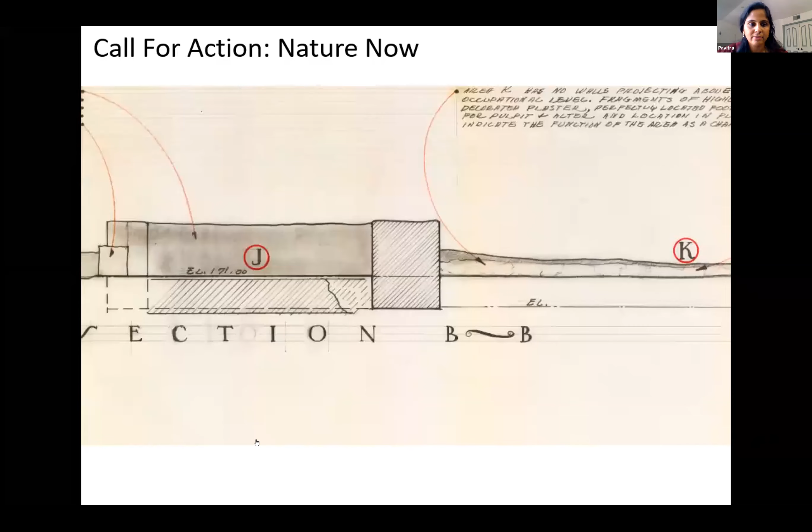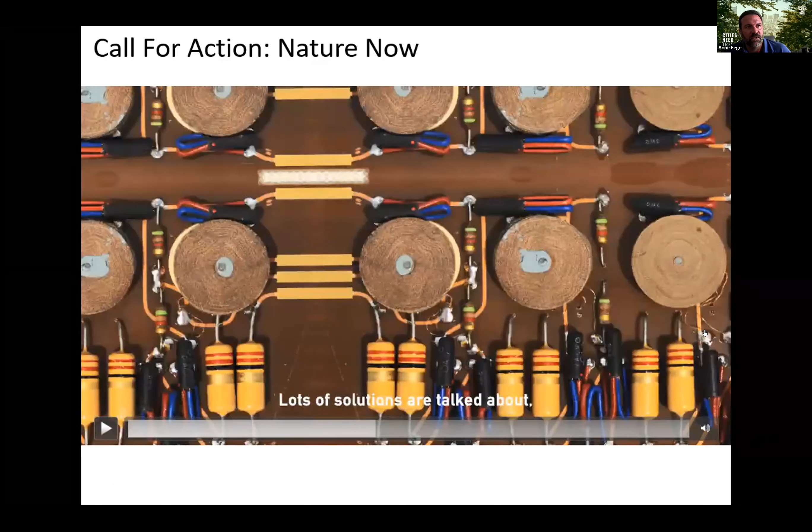Hey Pavitra, we're not able to hear the audio. Do we want to put a link in the chat so we can move on to the presentations? Sorry about that, you can't hear it? We see the video but can't hear the audio. Let me see if I can fix it. Maybe in the interest of time, we put a link in the chat so people can watch it later. It's Greta Thunberg, our famous climate activist, so I'll share the link. Now I'll pass it on to Brian.

Thank you, Pavitra, and what a great panel of speakers. I'm Brian Widener, San Diego City Forester. I manage and direct the San Diego Urban Forestry Program citywide.

I am housed under the Transportation and Stormwater Department, which manages the street trees, but I work closely with the Parks and Rec Department as well as many other departments throughout the city to manage, maintain, and promote our urban forest.

So I'll dive in here, just bear with me. Today I'm going to talk about navigating the recent challenges in our urban forestry program. For background, the City of San Diego urban forest has about 220,000 street trees.

We think we have about 600,000 trees in parks. According to a recent US Forest Service analysis of plot data throughout the city, we think we have possibly about 5 million trees citywide, both on public and private property. And I always like to point out the urban forest isn't just about trees, it's also about people—we have 1.4 plus million citizens in San Diego.

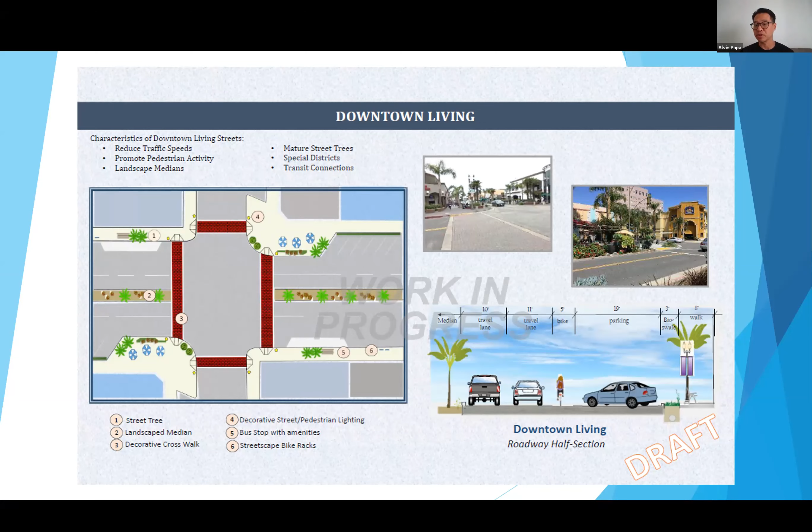So this is an example of what something could look like in our downtown, and this is an example of something within an urban area or one of our secondary connectors. Typically, we try to strive for permeable pavers, putting items in the parkway, bioswales, and landscape medians. This document serves as guidance for our engineers.

In the city of Long Beach, our public works department is comprised of about 500 people, and about 100 of them are in the engineering bureau designing projects.

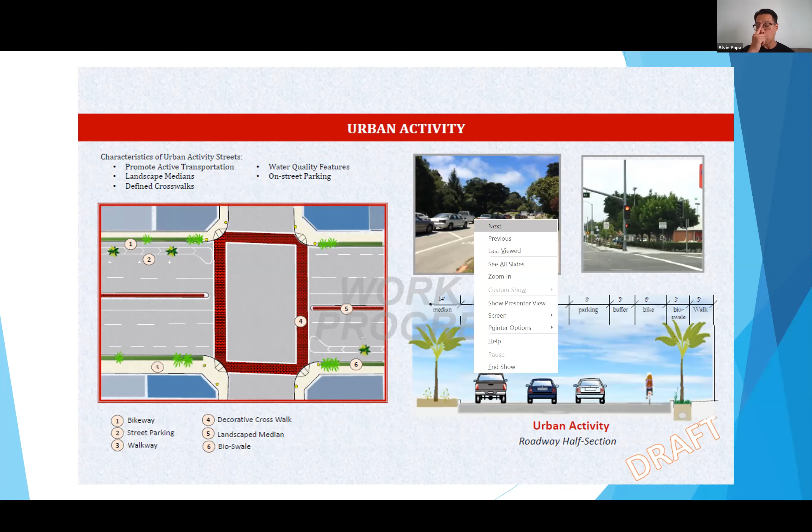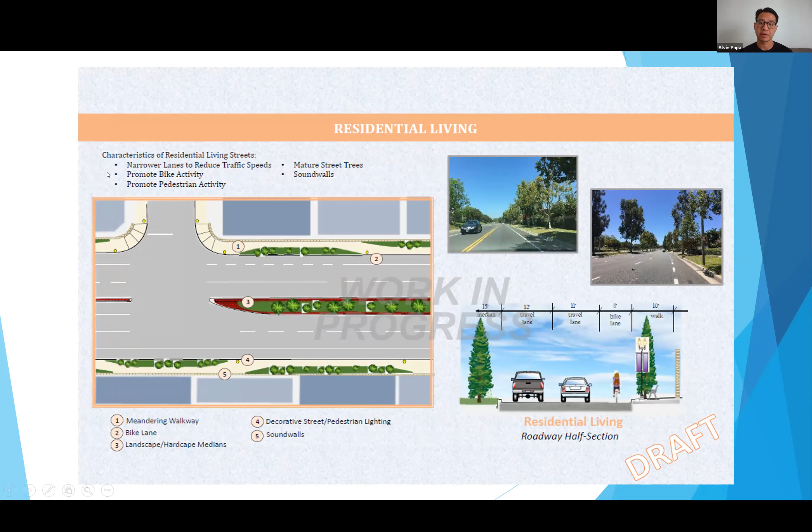So although we do work with developers on identifying low impact development solutions, we're always looking for new technologies and new ways of implementing green infrastructure. That's actually how we met Pavitra - she did a lunch and learn for us on Silva Cell, because we were investigating new opportunities.

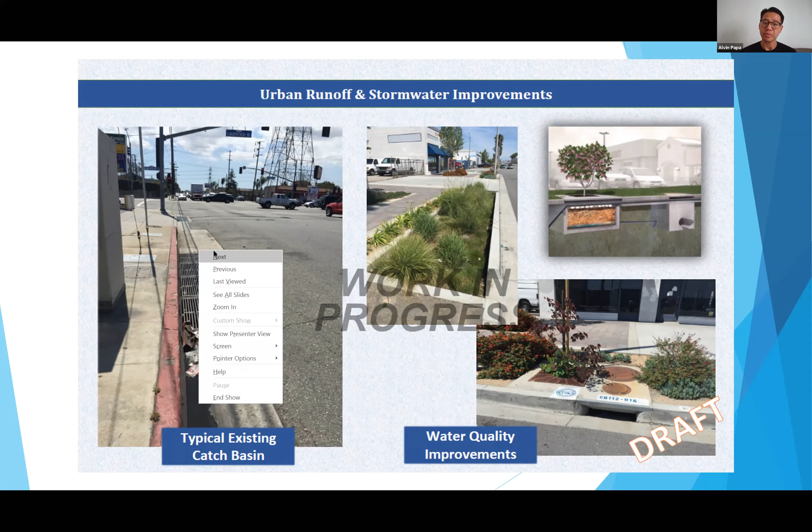This is another page of the water quality planning section of the document, where sometimes we use French drains, sometimes we utilize parkway areas - these are all guidance documents for our engineers.

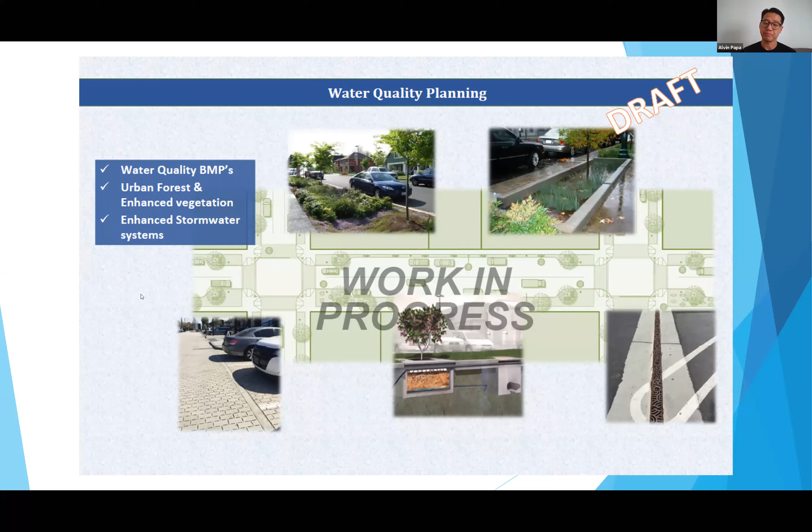We're also working on expanding - this isn't within the document, but we're looking at additional ways to not just use the linear area within the right-of-way, but to identify other locations of opportunity. This is a portion of Artesia Boulevard located by the off-ramps where Caltrans has roundabouts, typically filled with ice plant, which is just extra area not being utilized.

So we look to leverage transportation funding and identify opportunities - where can we take advantage of areas that aren't being used, and how can we plant them with urban greening elements while getting that funded? Typically when we get things funded, it's not strictly from a stormwater perspective - we have to look for multi-benefit projects, connecting to a bike path, passive recreation, or a walking trail. We also look to develop habitat through wetlands, and I'll talk about that a bit later.

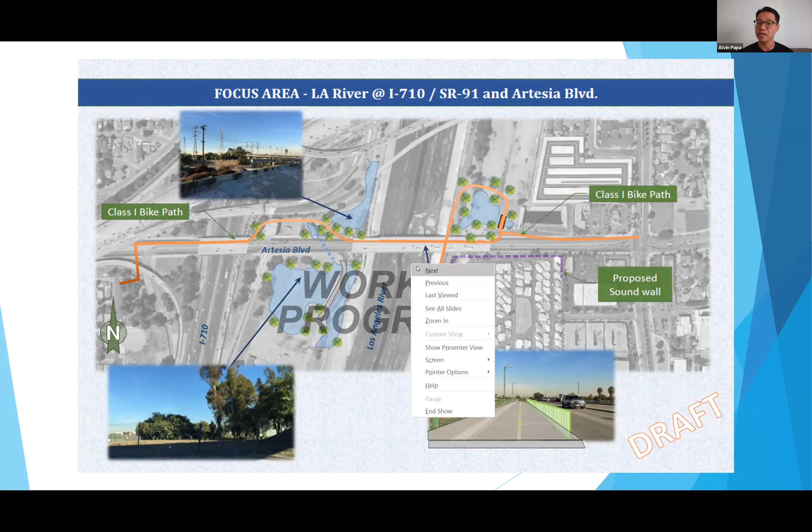In short, the first few slides are the type of documents we use to envision how we want to implement urban greening and green streets. I'm going to talk about Market Street now - this is a project currently in design, at 30% design. It utilizes visioning documents like the one you saw, but I'll talk about what our engineers are going through now.

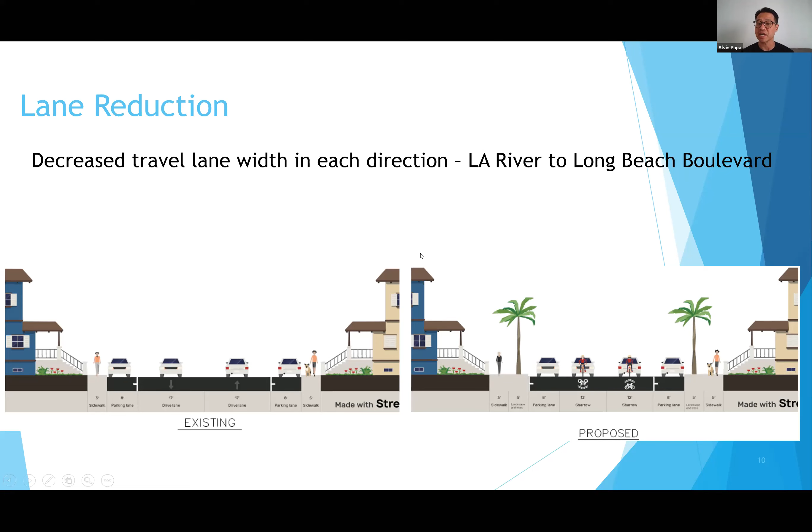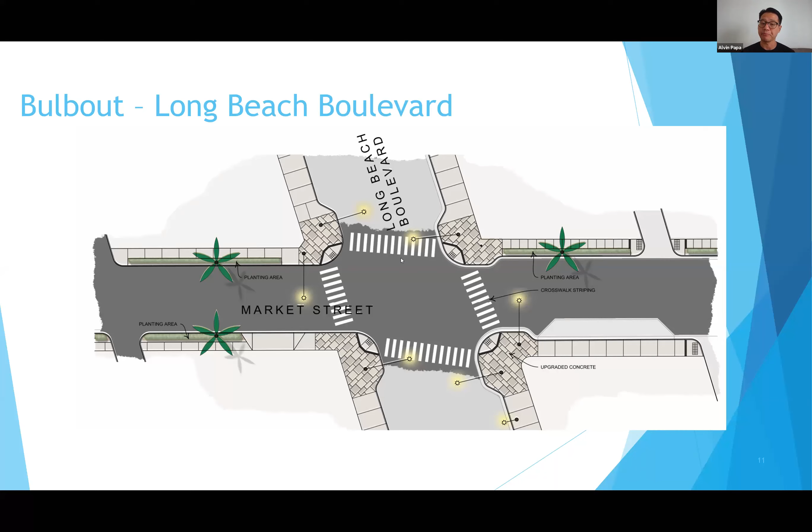Typically we have a spacing requirement for our trees, so we don't really have much opportunity to install new trees unless we're adding additional right-of-way space, or there isn't a parkway that already exists there.

This last section I want to talk about for the next couple of minutes is the LB MUST, a project that's actually in construction. One thing I want to note is complete streets is something we've pushed in the past, but when it comes to urban greening, the biggest impact is on regional projects. That's where we're going to be focusing on finding those opportunities, and the LB MUST is one of those.

LB MUST stands for Long Beach Municipal Urban Stormwater Treatment. This project is a stormwater treatment facility which captures water from the roadway, and it's going to treat about 12,300 acres of land - about 40% of Long Beach. Normally the water would go from the pump station to be pumped into the LA River, but that creates a huge pollution problem for us.

So what we're doing is capturing that water and bringing it to this plant for treatment. As part of this project, we plan on collecting the stormwater through a series of existing pipes, but also identifying areas for wetlands and bioswales. It's about an 8-mile length up and down the LA River within Long Beach. For us, that's a huge opportunity and a big lift, but I think this is the type of project that gets regional significance - it gets a lot of political will behind it. And the best part is it provides multiple benefits, which I'm going to talk about on the next slide.

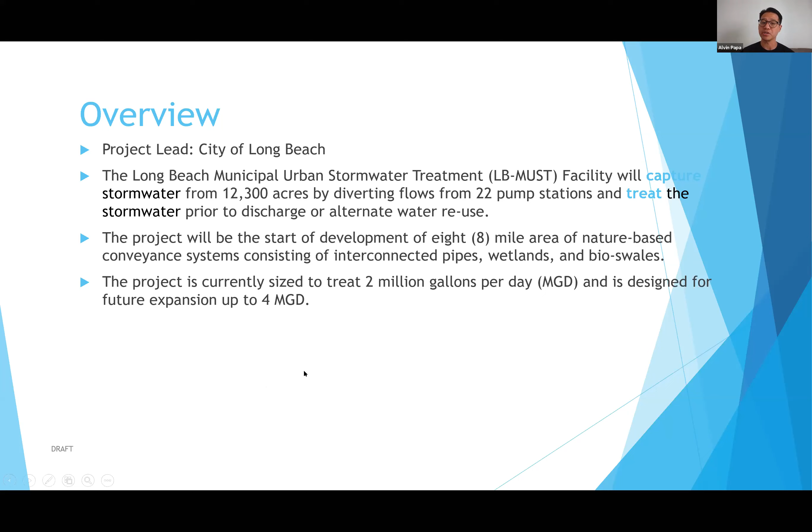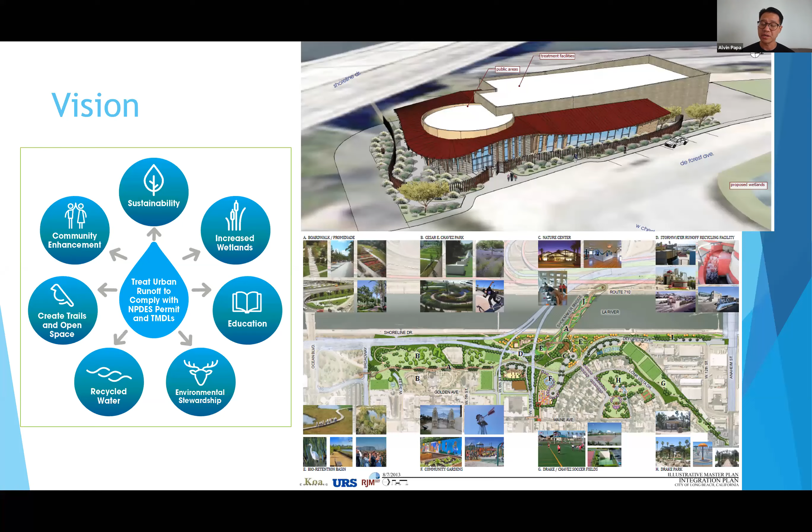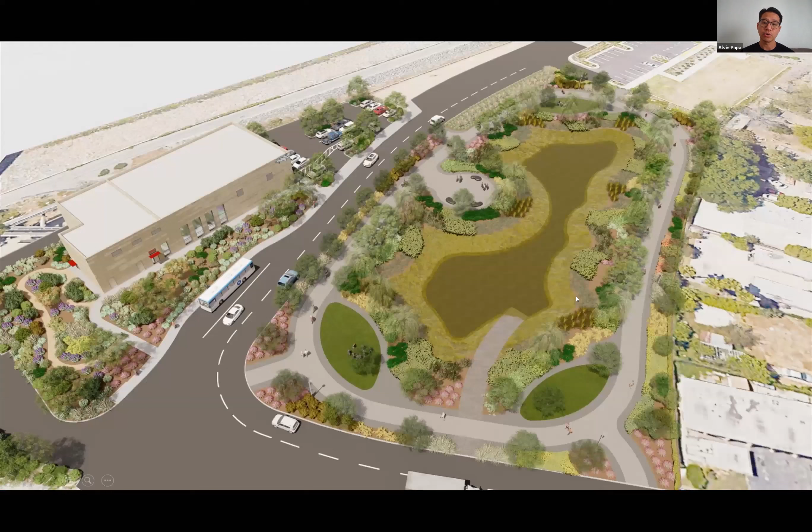So this is what that treatment facility would look like. The wetland would be across the street, and you'll see a garden wrapped around the building—for us, that's going to be a demonstration garden. One of our ideas is to put in low impact development demonstrations, so we plan on doing public-private partnerships with vendors to show us their products and partner with the city on filling that space, hopefully at their cost—we'll see. But that gives them an opportunity to advertise their product.

And when we have developers come into the city and give them requirements to install things within the public right-of-way, we can say, hey, come over to this project—you'll be able to see what we're actually requiring you to install. And that way they can work directly with the vendor or find something similar.

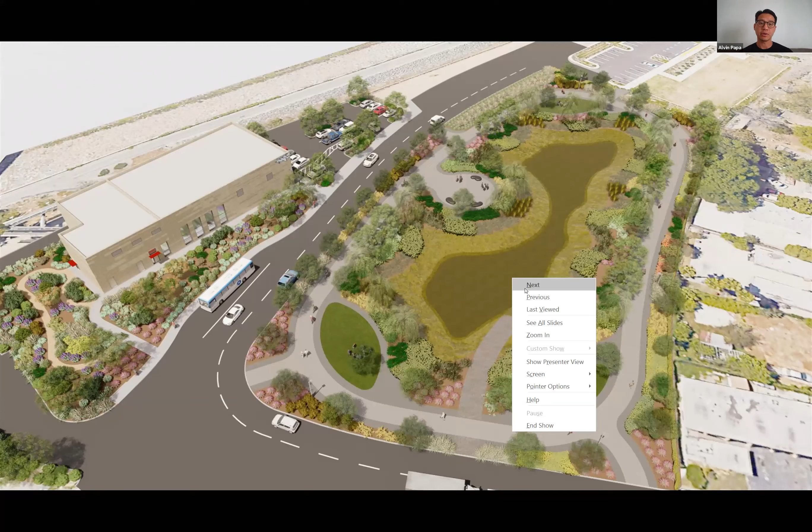So these are just some of the elements that are going to be incorporated in this regional project. Water quality and water supply—that was the impetus for getting a lot of the funding for this project. We got $28 million from Caltrans for stormwater quality. And then we started, as part of the Safe Clean Water program—

the Measure W within LA County is a measure that helped provide funding. They needed multi-benefit, but it's water resiliency. And so the potable water offset features of this project were able to bring approximately $10 million to this project, which we're hoping, cross our fingers, gets approved by the LA County Board this month. We've already begun construction, but we do need that last $10 million to finish.

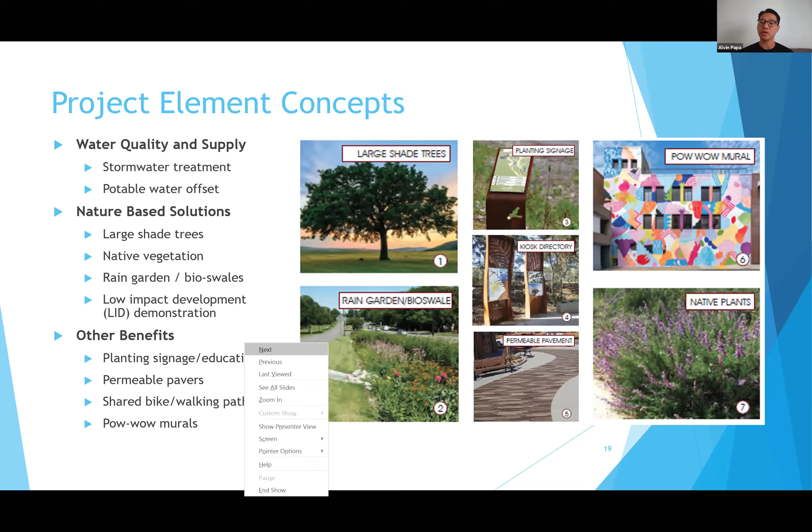But there are nature-based solutions—we have various shade trees, native vegetation, bioswales. We have that demonstration garden I talked about. But really the plant signage and education is really important, because we believe in hitting our youth with the knowledge. These are just some renderings of what it's going to look like when it's all said and done.

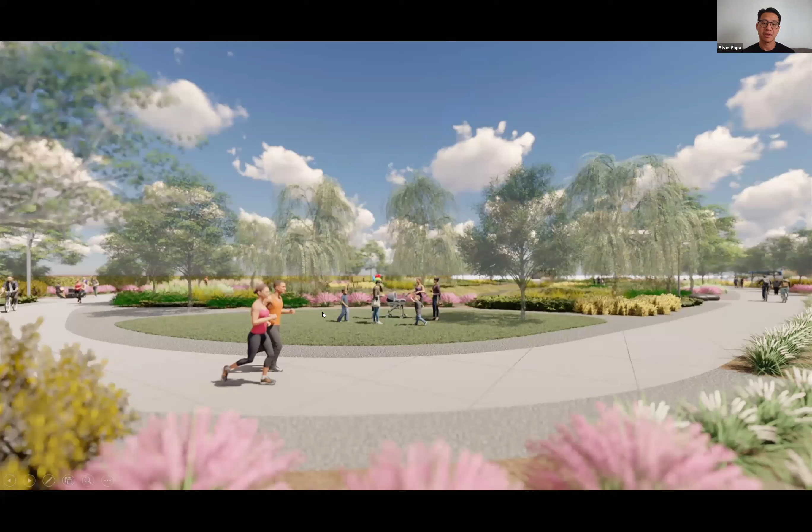I'm going to go through quickly because I know you guys have other speakers after me. This is kind of our master vision for the document—it wasn't just the project done in isolation where the star is. We looked at other projects in the area and tried to focus on a region.

You'll see that where the star is, where the plant is, we have a wetlands plan there. To the north we have an existing park, and to the south we have an existing park. We're looking at how we can interconnect these wetlands and enhance our existing spaces, doing this as sort of a large regional effort.

And then you'll see a long thin strip going to the south—right now that's just an area by our levee that's not being utilized. What we envision is: to the very far south, there's a county pump station that pumps water directly to the river. Instead of doing that, we plan on working with the county to put that water flow into a swale, and that swale would take it to the Long Beach MUST. So instead of conveying that water through a pipe, we're saying let's convey it on the ground through this nature-based solution, which will treat the water naturally and reduce our treatment costs.

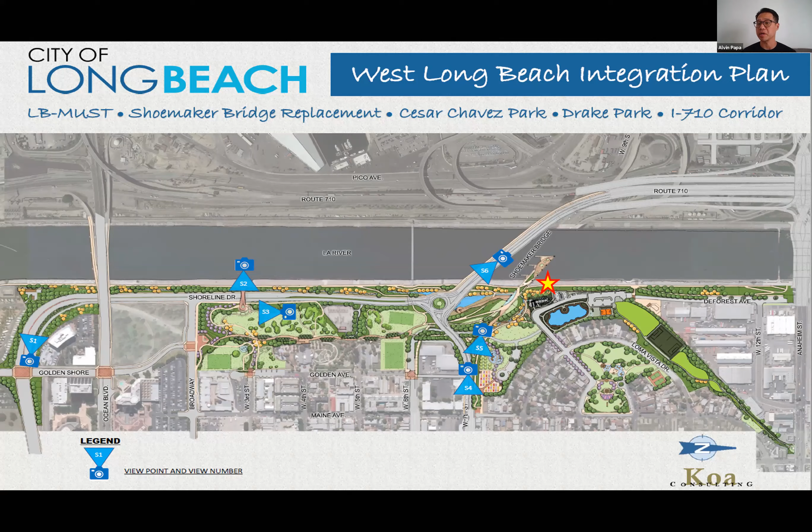In this next slide, I want to share some of the challenges. I know complete streets is something a lot of cities are pushing, and it's a big effort. But for us, when it comes to implementing complete streets on roadway projects, the funding is typically limited, and there are higher priorities. Pavement is a huge thing throughout cities in California. I think the average city is doing fair, and most cities are doing poor with regards to managing their pavement.

So that's where the bulk of the funding needs to go. The City of Long Beach was sued with regards to accessibility and sidewalks, so we actually have about a $300 million need to address our sidewalks. So either we can spend that money on trees, which for us is nice to have, or we can spend it on sidewalks, which if we don't take care of now, will increase our financial and legal obligations in the future.

And then also active transportation. Ultimately, we have to look at the cost-benefit of implementing street projects in a linear fashion versus larger regional projects, like the one I talked about with LB MUST. So what we're looking at is larger regional projects and how we can get funding towards that, because with those multi-benefits, it's easier to get funding, easier to get partnerships, and easier to get grants when you're leveraging funding from different sources, such as transportation, parks grants, stormwater grants, and using all those together.

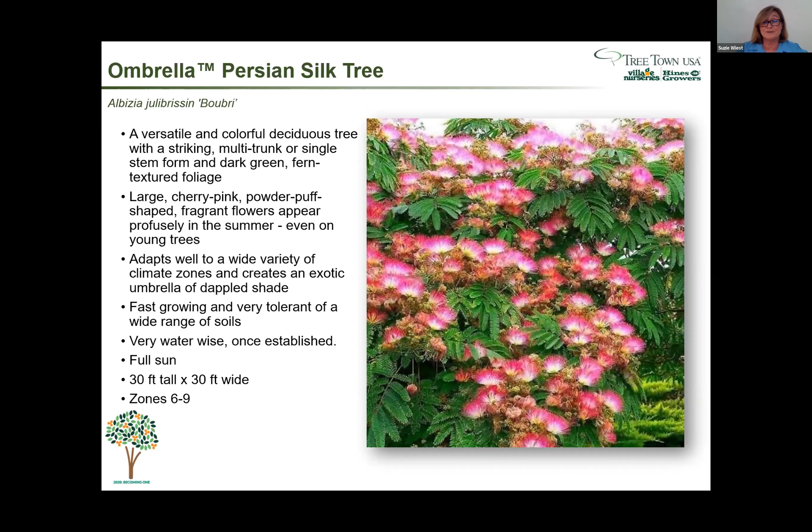If you're going to prune, you'll want to do it during late winter or early spring. This is one where you'll want to make sure it has some space for that big wide canopy. The flowers are very fragrant, so you might want to put it in an area where people can appreciate that fragrance. I imagine this also as a park tree because of that umbrella shaped canopy - people having a picnic beneath it, and the flowers bloom profusely all summer long. It's really a gorgeous tree.

Next, this is one of the tried and true trees. This is very beautiful, and what I love about it is it's a very clean tree. This was actually a hybrid between Bauhinia purpurea and variegata. It was discovered on an island near the ruins of a home on an island right on the shore in Hong Kong. It was named after their governor at the time, who happened to be a great plant enthusiast, Sir Henry Blake. It's considered one of the most beautiful trees in the world, and it became Hong Kong's floral emblem in 1965.

I happen to love this tree. I have a personal love for it. Yes, the flowers are gorgeous - they're about 5 to 6 inches wide, a deep rose pink. They're also sterile, so they won't set seed pods. But this tree provides extra interest even in the leaves - the leaves are double lobed and look like little butterflies. When I was growing up, we had one in our backyard, and we still refer to it as the butterfly tree. It's a really nice tree.

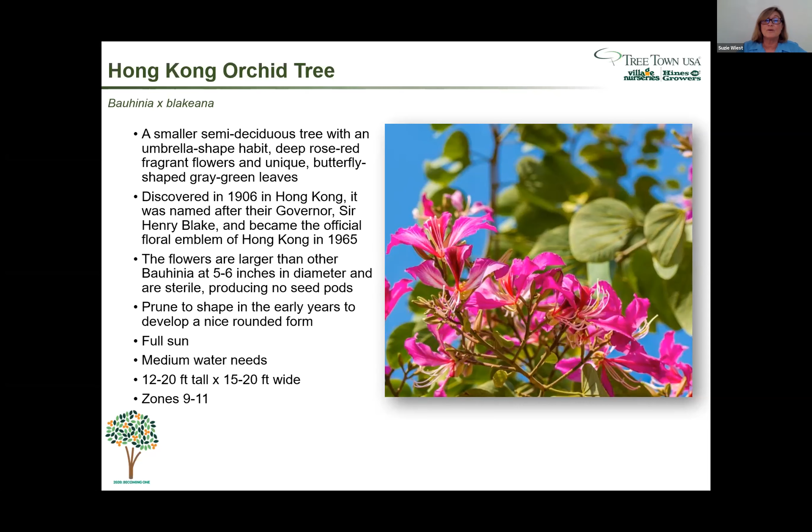If you'd like to see it in action in San Diego, I've seen it used in some parking lots in the La Jolla Renaissance area, in one of the little shopping centers there, and it always looks nice. When it's in bloom, it goes into bloom pretty much late fall through midwinter, and the leaves drop for a very short time, and that's when it blooms. This is a really interesting tree, and it's also low maintenance - the only pruning you'll need is maybe to give it its nice round form when it's really, really young. Really beautiful.

They're also much less susceptible to leaf scorch. This is the result of a breeding program - it's actually a real breakthrough - from a man named Denny Werner at the J.C. Raulston Arboretum in North Carolina. He has bred many different Eastern Redbuds, and I think this is going to be probably his claim to fame. I'm really excited about this one.

It's only about 15 to 20 feet tall. I would use it as a focal point for our smaller urban spaces, you could even plant it in mass. Notably, it was selected as the People's Choice Award for Best in Show at the Far West Show up in Oregon, because it was so beautiful while also being low maintenance. As a redbud, it also has those adorable heart-shaped leaves, and it's an excellent habitat plant - hummingbirds love the nectar of the flowers, and birds love the seed pods. This is just a really nice plant, very stunning.

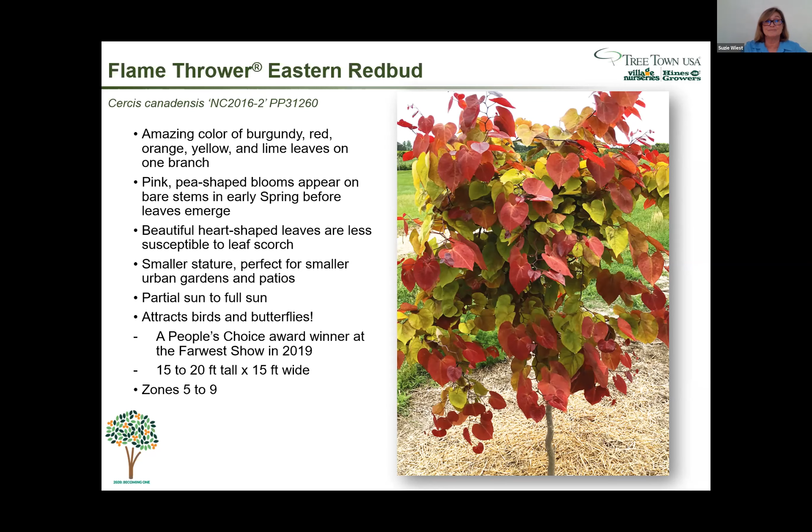Now, Merlot is also an Eastern Redbud, and it is very similar - it's got that beautiful burgundy color. It's very similar to Forest Pansy, but this one has Texas Redbud in its lineage, which means it's going to be even more drought tolerant. It has a thicker, glossier leaf, and it actually stands up better to the summer heat. The new growth comes out a really deep purple, then matures to a burgundy before turning to kind of a muted dark green.

What I love about this tree, because of the burgundy color, it adds that dramatic color and contrast. The burgundy color pairs well with some of the lime greens you see in the landscape - for example, you could plant Lomandra Breeze below it, or maybe an Acacia Cousin It. This is an understory tree, so they can take some shade. I'm also picturing Mahonia Soft Caress, that gorgeous texture. Anyway, that is Cercis Merlot.

I also want to mention, because we do field test these trees, and I've been observing this tree for about 3 or 4 years now, one thing of note is it has a very strong juvenile branch structure. When I compare it to the other trees in the nursery, that is one of the things I've noticed, which is also a real plus.

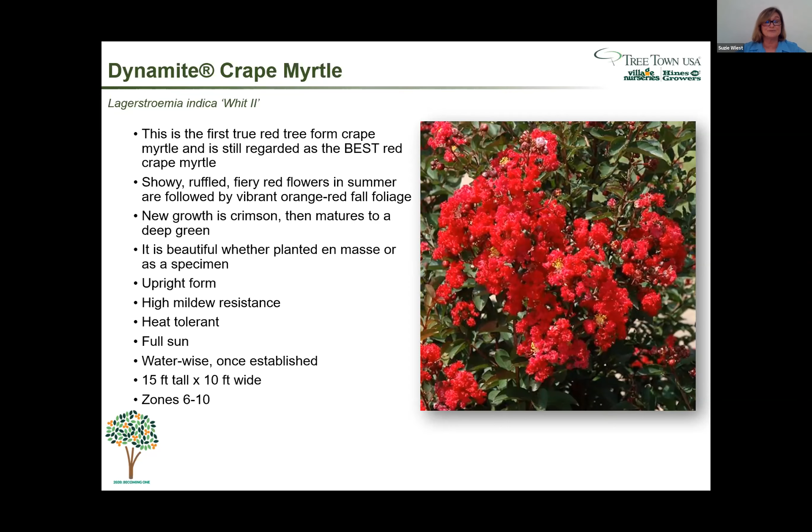Finally, I just wanted to speak a little bit about using the right tree in the right place. Trees provide many benefits - they clean the air, filter runoff, provide shade and habitat, increase our property values, and improve our overall health. But you have to use the right tree in the right place.

How is it going to be used? What kind of traffic? Is it a downtown area? Sun, shade? Is there going to be irrigation, or are you going to need a really drought tolerant tree? And maintenance resources - some of the trees that are very low maintenance, like the Bauhinia and the Albizia, and actually the Cercis, are quite low maintenance as well. So those are some things to take into consideration.

Deciduous or evergreen - most of the time I'm asked for evergreen trees, but I'm going to give a plug here for some deciduous trees. All trees lose their leaves or lose some part of themselves all year long, so you're never going to have a tree that is litter free. Deciduous trees just happen to do it all at once, and then they come back all nice and fresh. And I love that they let light in during the winter and then shade us in the summer.

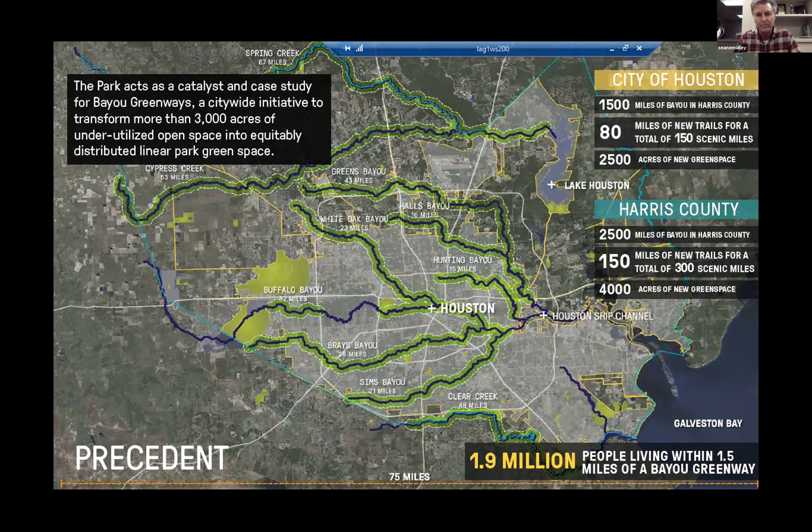So here, a very important transformative role in the city of Houston.

Now we'll talk about my hometown, Laguna Beach, which started as an action plan to really look at a tree replacement program, because trees, like people, grow old and die, and get sick if they're not the right tree in the right place, right, Susie? So we worked together with our arborist and other specialists to really look at the trees of Laguna and their current conditions, which are not good at all. No irrigation mostly, just suffocating in these sidewalks and compactions from the tremendous pedestrian traffic they get, which is a great thing, right? And then at the same time, how can these trees start to be the anchor for this public realm, and how to better that public realm, increase its width, create more gathering spaces, et cetera.

So it became a much larger project than simply replacing trees that have been hit by a vehicle or struggling because of disease, not getting enough irrigation, compaction and so forth, and all these different conditions they've been able to survive remarkably. That's what's impressed us the most about some of these trees.

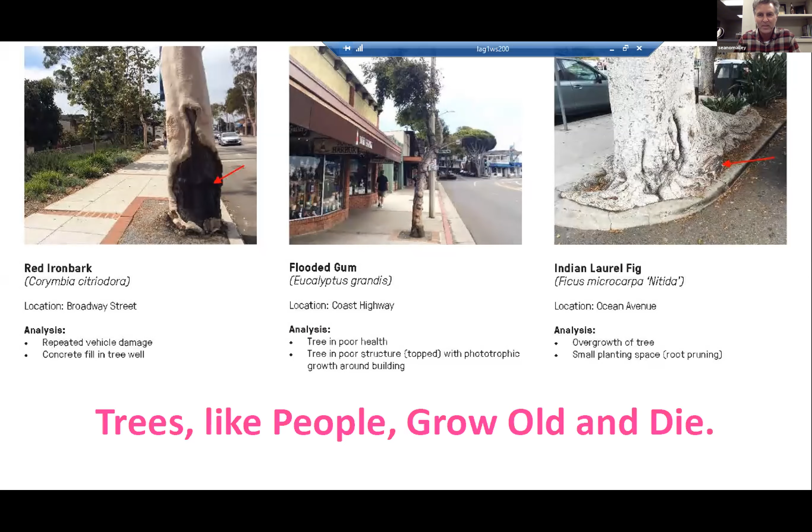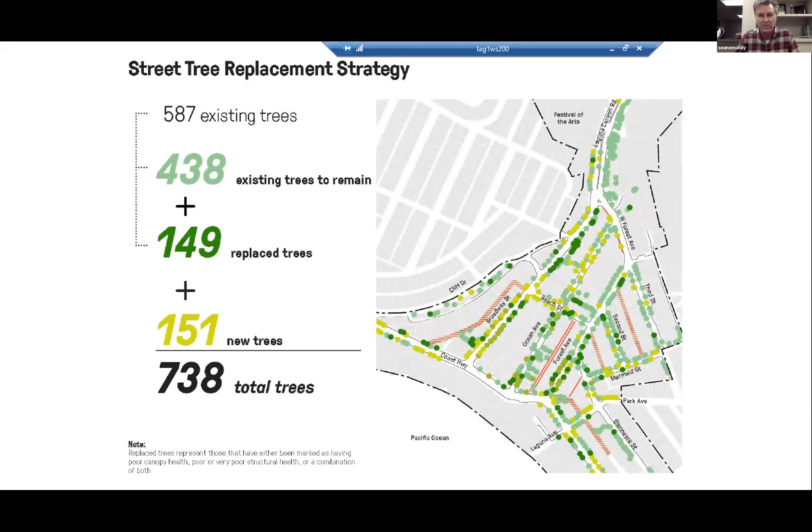So we're increasing the amount of trees here. In so doing, hopefully, as we move forward with Pravita's help, we can employ Silva Cells in key locations where we're taking up the sidewalks. This gives us an opportunity to remake the soil condition beneath, and Pravita can really describe this better than I can, but it increases the health of the tree - not only the biofiltration and water retention capabilities, but the health of the tree so it can survive our changing climate and more extreme conditions, and be less susceptible to disease.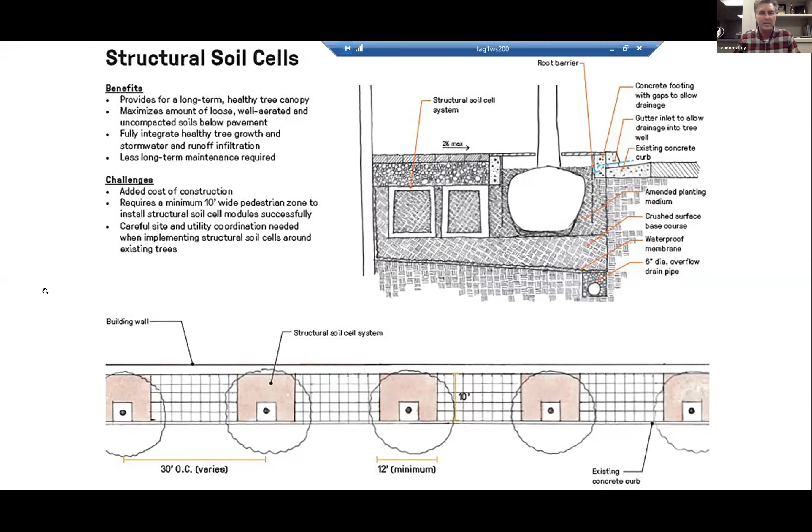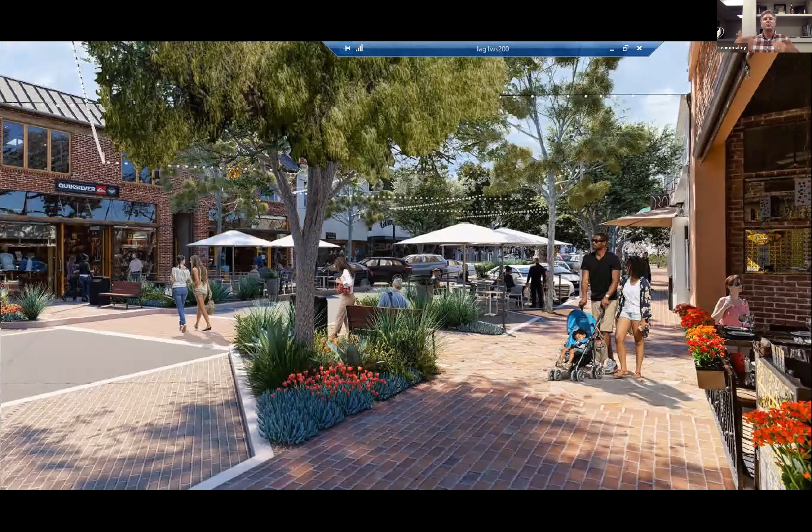So then how can the street incorporate more trees of a similar character - perhaps not the eucalyptus per se that we currently have, but trees like agonis or other species that invoke that same beautiful character of the eucalyptus. Also gathering spaces and new plantings and places for people, because ultimately these trees are about creating places for people, increasing the shade and the livability of our streets.

Now we have our current state of affairs. We were asked to look at this very street, Forest Avenue, the main street of Laguna, and how we can help out local retailers and restaurants. That involved really creating a pedestrian-only experience, blocking the street to vehicles, as a lot of cities have done now, including Long Beach and parts of San Diego - expanding customer seating, engaging local artists, really leveraging the eclectic character of Laguna and that artistic spirit that we have.

Some of the analysis drawings look at who's a restaurant, in red, and then who's dealing with merchandise and apparel, shown in blue, and retail. So there are different kinds of shops, of course, along any successful shopping street and eating street in California.

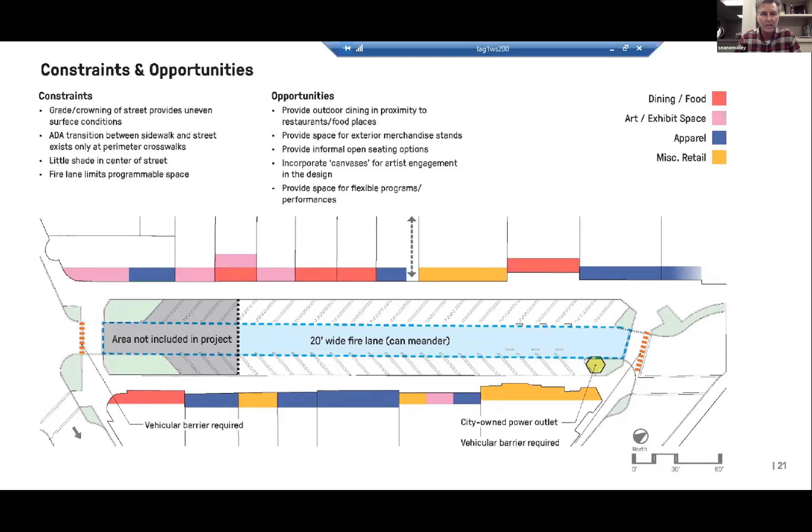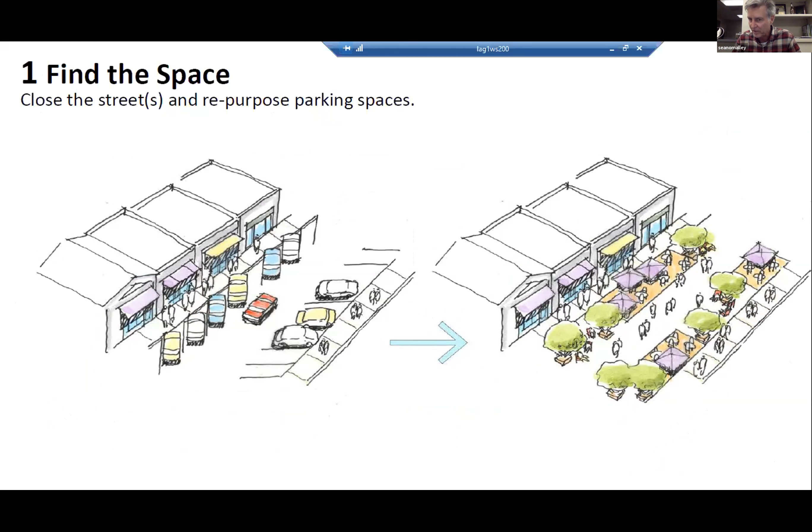On the left is the existing condition, and on the right is how that condition can be transformed - which started out as kind of a temporary solution, but now in talks with the city, it might become something more permanent. And then we're actually adding more trees, you can see in that slide. Again, the trees, I think, are the anchor for the comfort and beauty of the place.

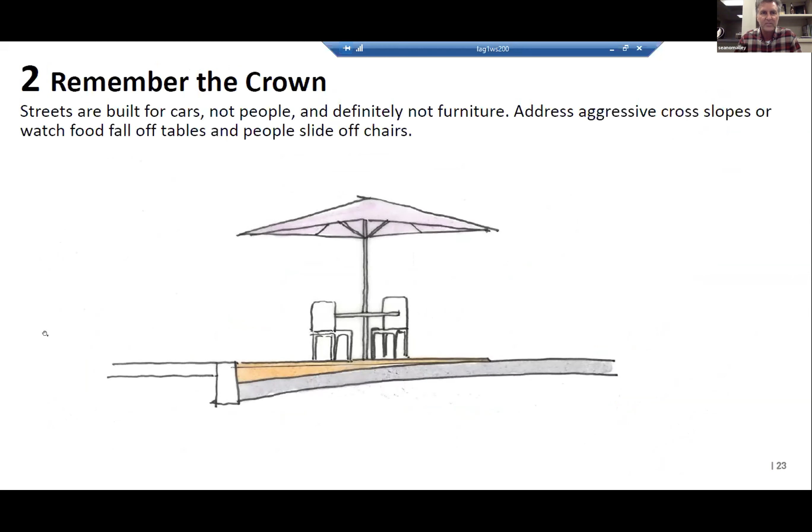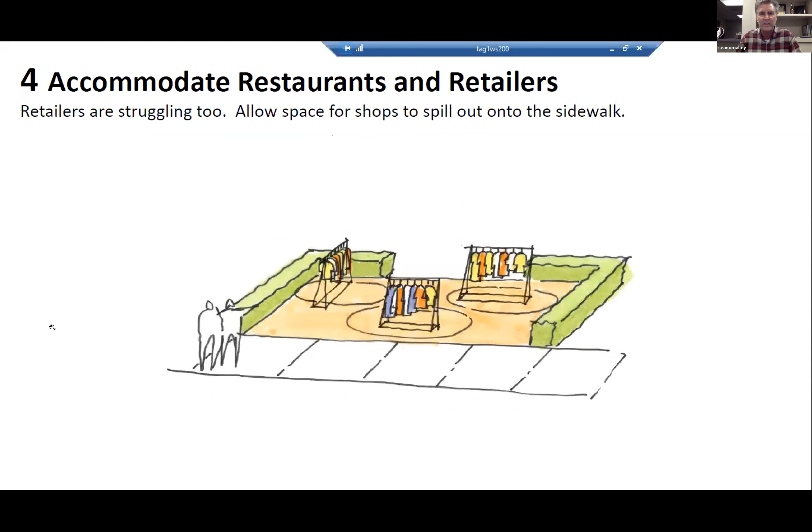So this is just only some of the specifics - we'll just go through these quickly, Ryan. The crown of the street, places for gathering spaces with some separation from pedestrian traffic, also places for retailers to bring their wares outside.

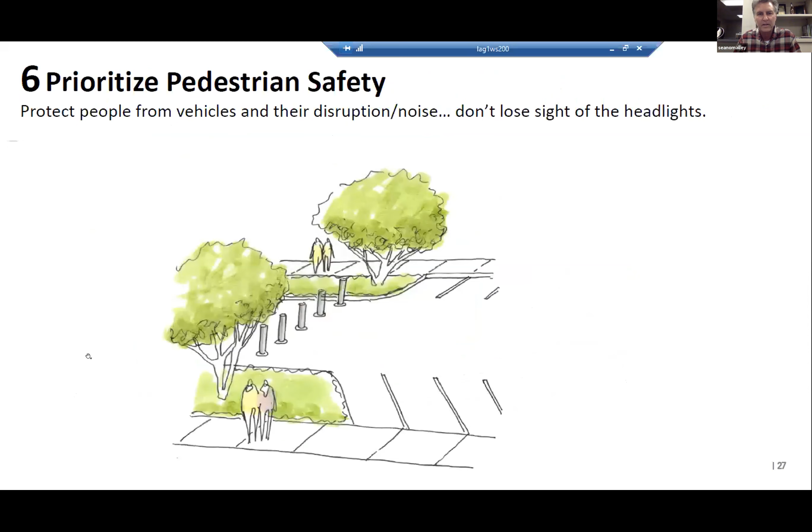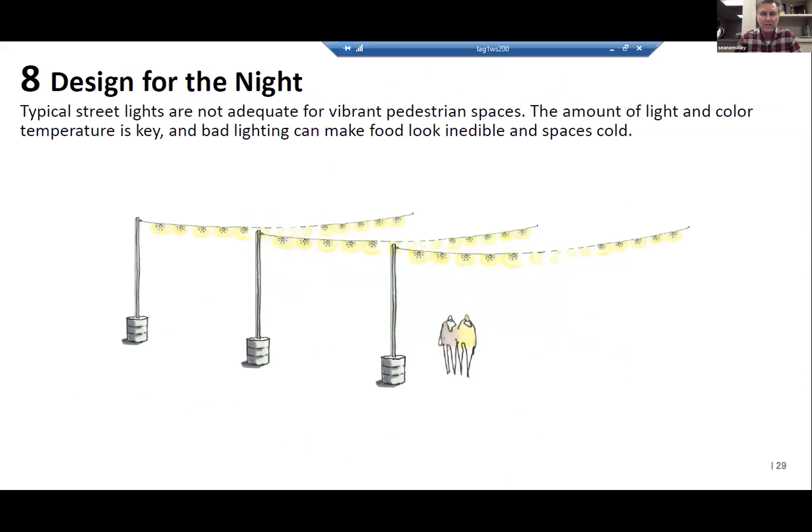Keep moving. And then, displaying some of the art and providing a separation from the vehicular traffic, canopies, overhead canopies for shade. Night lighting - all these things that, it's like decorating our living rooms, basically, our outdoor living room of the city. Maybe places for play.

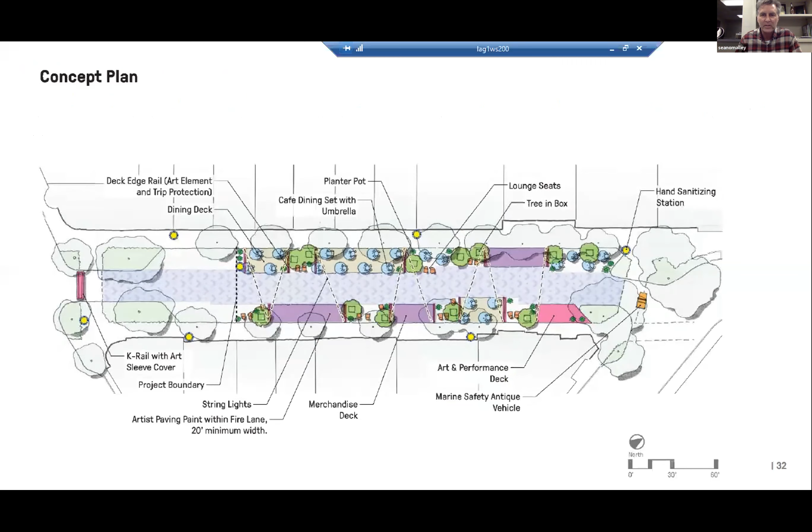And of course, the seating diagrams for safety.

So, what was the pre-existing condition? I almost said, and then.

And it's really become a great place, both morning and evening. I take my oldest daughter here with her friends, and it is packed, almost to the point of it's unsafe. And so they've been having a kind of hard time keeping folks out. And just anecdotally, there were a couple businesses that were kind of against this idea of closing off vehicular traffic, particularly the retailers, but they're actually saying they have better business now than they were before. I think because folks are keeping the shops open late at night, and as they're waiting for their dinner reservation, they take a look and see what's available in the shop, and really make an entire evening out of it.

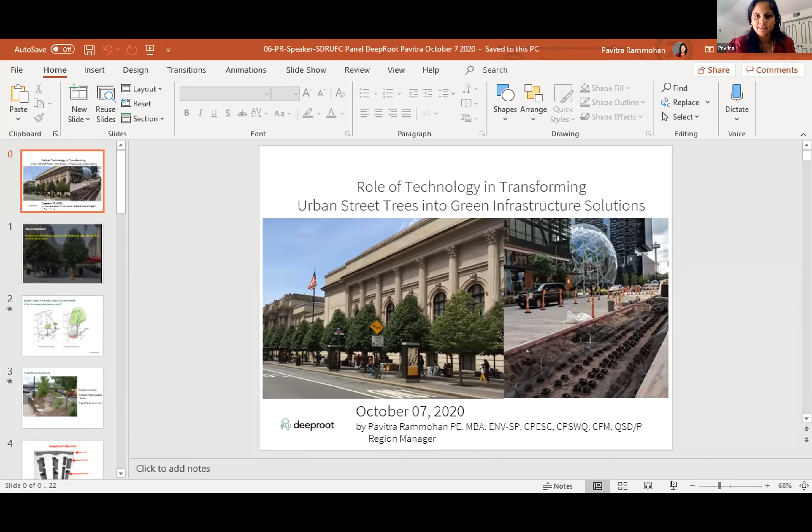Okay, great. The emails are nonstop, but are you able to see my screen?

Oh great, thank you. Yeah, so again, right away, we heard other speakers share about what is the ideal conditions. We talked about right tree for the right place. We talked about what are some of the considerations we would have in place in terms of the size and the capacity that a tree would need. Having said that, we still live in urban setups, and those aren't ideal conditions, and that's where there is limitation in terms of space restraints. And so that gives an opportunity for us to explore what type of technologies are out there, where even with limited space that we have, what is the best that we can do in terms of having healthy tree growth. And at the same time, like Alvin was talking about, focus on multi-objectives, be it enhancing urban tree canopy or water quality improvement or capturing the stormwater and sustainability and reducing heat island effect.

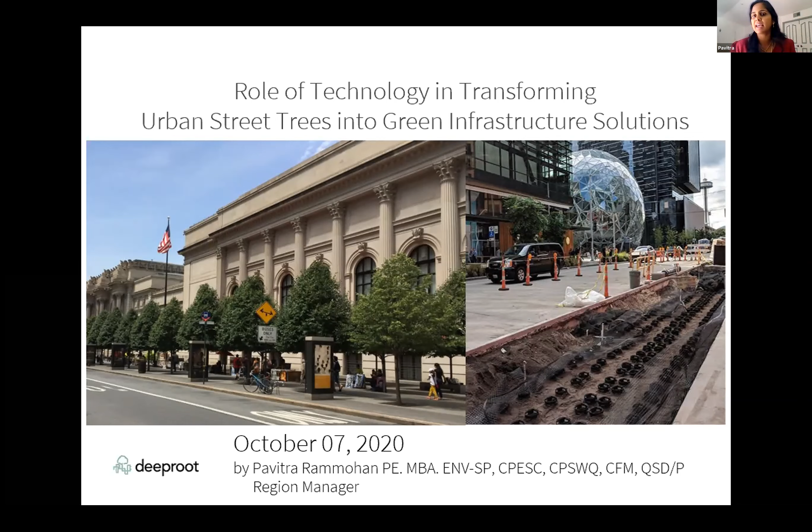So that's the story here, a little bit about our firm, Deeproot. We are a global water technology leader. We have been in the market over 25 years, and we have installed over 2,500 projects across the globe, headquartered out of San Francisco.

And the case behind it is the normal trees, the urban street trees that we see, is that the traditional planting, where on the left side of the screen, you see where the soils are heavily compacted, and compaction can be criminal for tree growth. So what Silva Cells, our technology, provides is this vehicle that can hold lightly compacted soils, about 60 to 65% maximum, with just walk-through compaction. At the same time, the cells provide the structural integrity that the paved surface above is going to need. So we can retain that parking stall, or we can retain that pedestrian-friendly parkway, while letting the tree grow and attain its maturity.

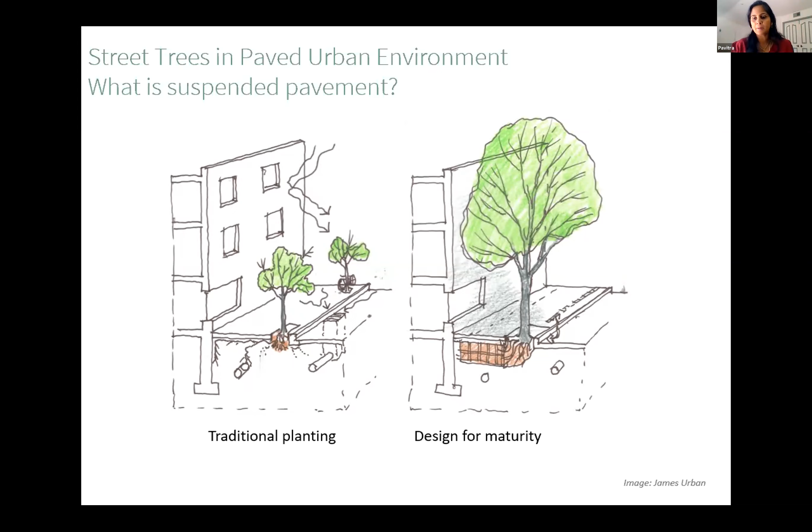One of the things is right away, this is space taken off the surface area. We're in Southern California, and that's an additional parking stall that can be used, not to mention all the excessive operation and maintenance that go with it. Just to be dramatic, you could have a dead cat clogging up that bioswale - sorry, cat lovers - that could just clog up the entire function of this best management practice on site.

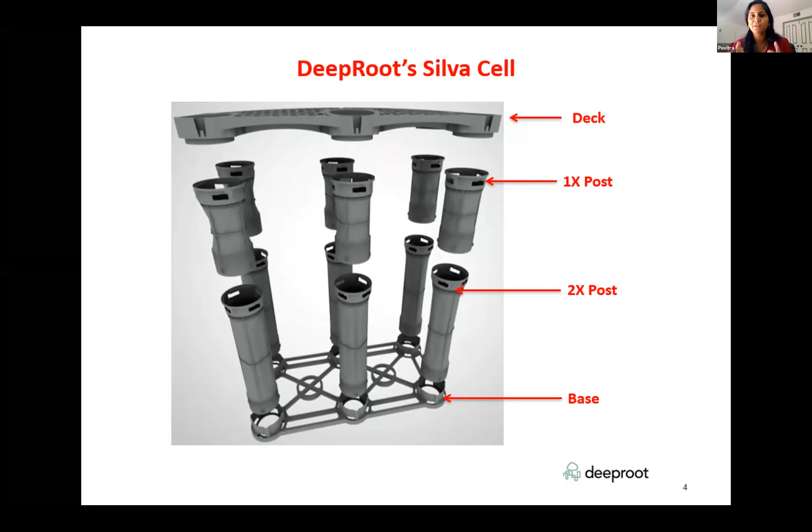So you have systems such as silva cells. This is a picture that consists of different components, and they are compact, they are underground, and they provide this robust bioretention strategy of both managing stormwater and promoting roots to be able to grow within favorable conditions of good soils, with water and air that can go through it.

They come in different sizes, to simplify the difference between each of the models - 1X, 2X, 3X - basically the depths, which directly correlates to the soil volumes. Within a silva cell 1X unit, roughly speaking, we're talking 10, 20, 30 cubic feet of soil volume that you would get within a unit. So think of them as Lego boxes.

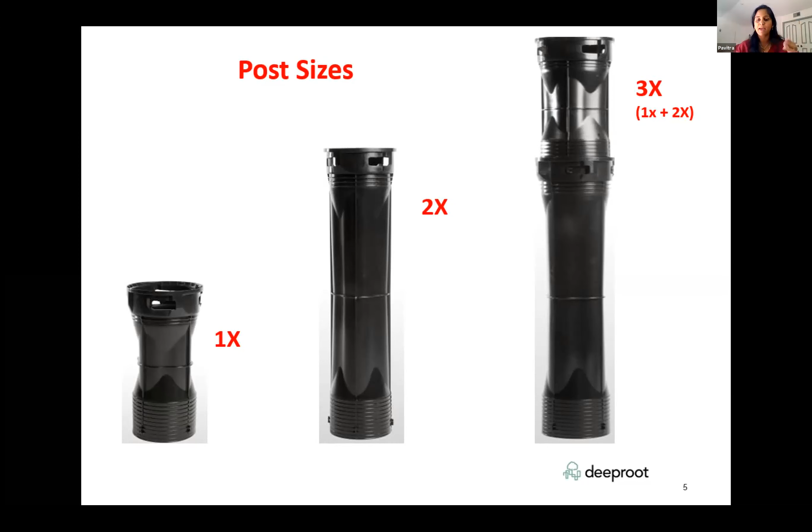This is a quick profile, just to show you how the silva cells are packed in between aggregates, both below and above them. Then you have the pavement on top of it, the paved surface. Silva cells are compatible with different types of paving - you're working with asphalt, permeable pavers, concrete pavers, or decomposed granite pads. So it's really compatible with many of the different types.

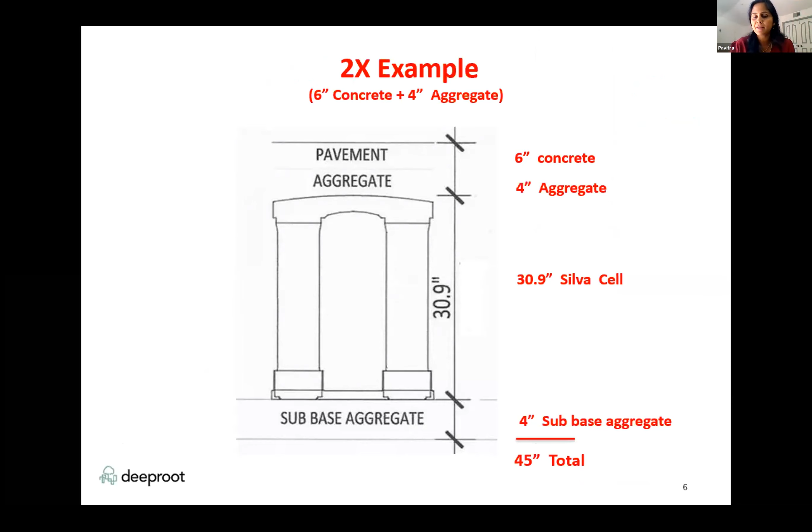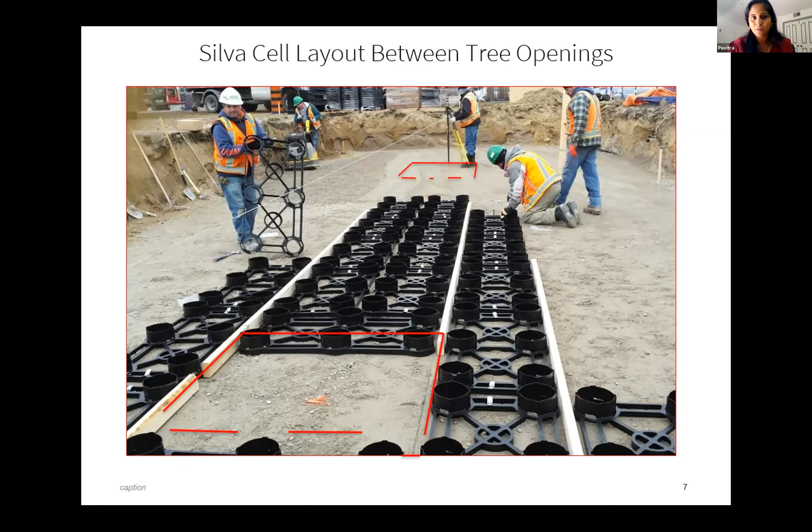This is exactly the key point of silva cells - it allows for walk-through compaction. So you're not bringing in a compactor where you're compacting to 90, 95%, which kind of misses out on the opportunity for trees to be this incredible treatment engine, part of your BMP train that can take in and suck in all the nutrients, nitrogen, phosphorus, instead of them ending up in end-of-pipe treatment facilities where you're trying to treat it as a pollutant. So using natural solutions to be able to achieve sustainability.

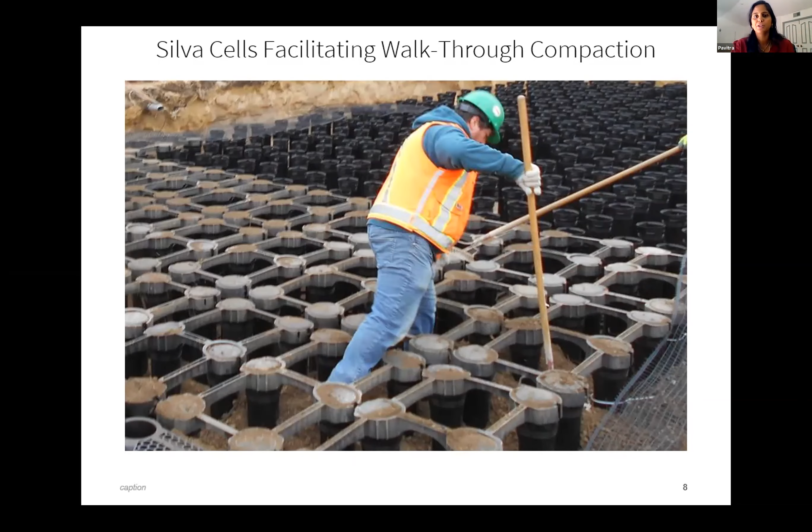This is just a quick picture where silva cells are assembled and ready for soil fill and simple walk-through compaction. Here are some quick shows of projects in our region. This is the Armorlite Drive in San Marcos, where, as one of the examples Alvin had shared, an industrial yard, a maintenance yard, was transformed into a living street with multi-family dwelling units along it. This project won awards from APWA, American Public Works Association, and over 80 trees were installed.

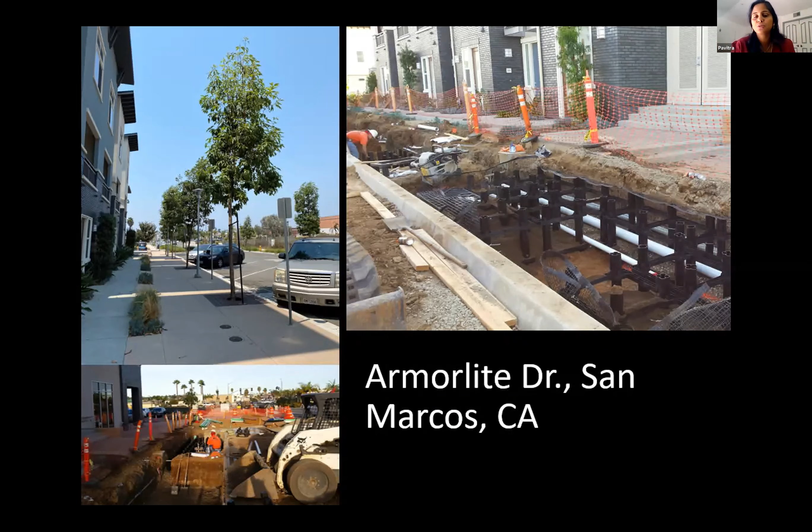This was a minimum of about 500 cubic feet of soil volume per tree, which is really the magic there, supported by silva cells. You can see how utility pipelines can navigate and travel through these cells and be able to bring in the runoff from the storm drain to navigate through these bioretention cells. So this is how it looks now, two weeks ago, in terms of their growth and how they're able to mature well.

And you can see how Silva cells right next to the station waiting area is useful for pedestrians and transit users, as shade. And this is another project.

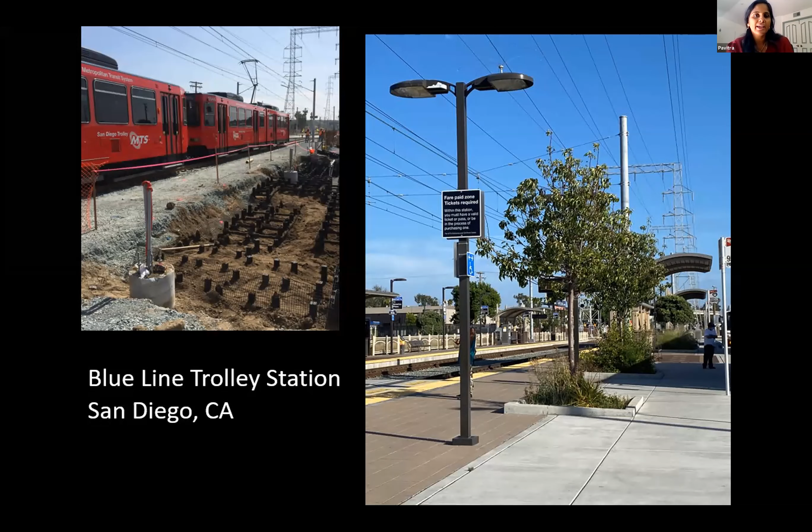This is part of the Del Mar downtown, Camino Del Mar downtown corridor project, where Silva cells went under both sidewalks, on both sides. It was used as a stormwater BMP to meet the city's MS4 permit requirements. In addition, over 40 trees were planted, and we had folks from the County of San Diego approving Silva cells as part of their Green Street Design Manual to support trees and green infrastructure implementation.

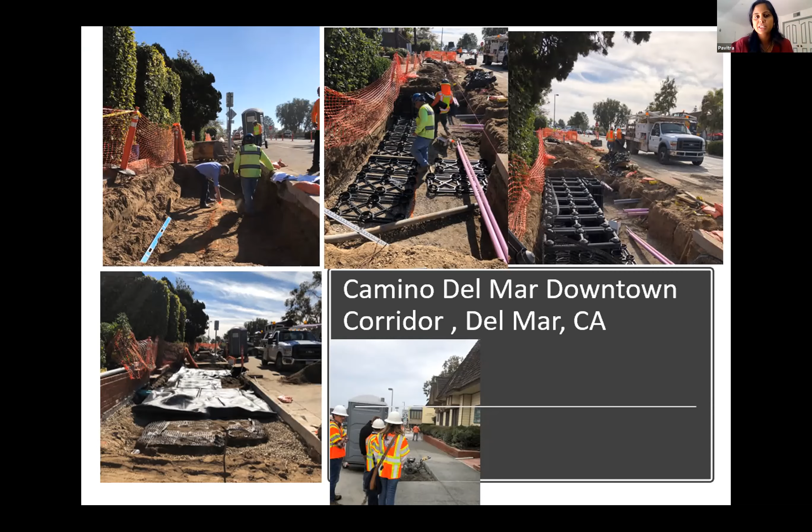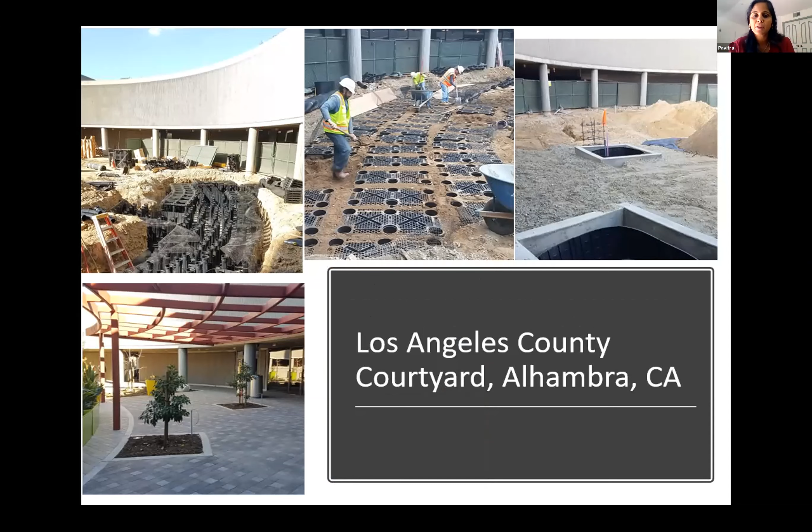This is the Los Angeles County new courtyard in Alhambra, where they have Silva cells to support a half a dozen trees. Another green street application along the public right-of-way in Santa Monica, along Cloverfield Boulevard.

So basically, as you can see, these are different applications with different sidewalks that we are working with. We would all like the ideal situation where you have enough room, but what happens is we're limited by the size of the swale, or limited by the area allotted to it. We can still leverage technologies like Silva cells to achieve those dreams and build our complete streets.

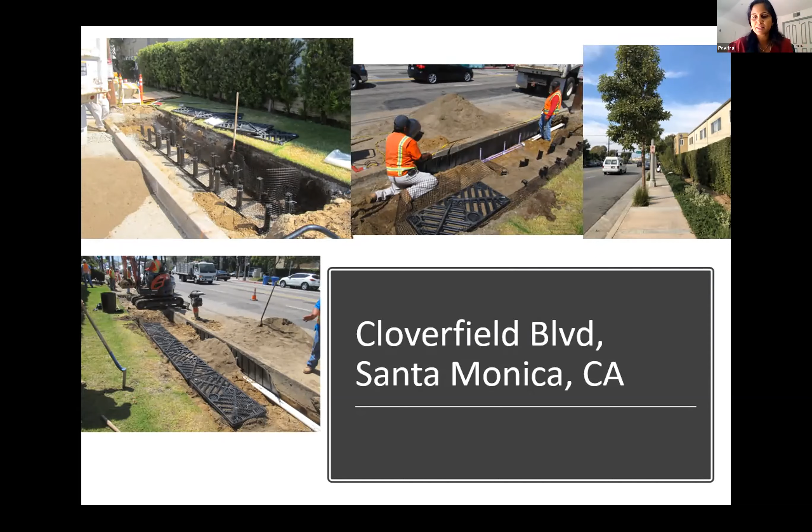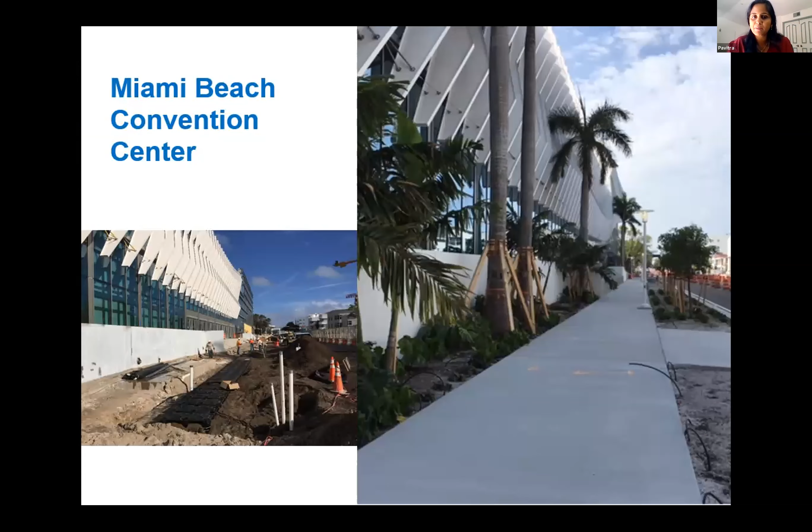So key takeaways. Number one, as all the speakers talked about, it's always multi-objective. That's how we're able to leverage multiple funding opportunities, multiple stakeholder groups, bring them to the table, consensus building. So we have projects that can speak to different objectives and funding needs.

The second aspect is ease of installation of this technology. It's not rocket science where you have to change the design. Silva Cells can fit in, depending on whether your approach is filtration or infiltration, and allow for light compaction, without compromising on the paved surface and its functions above.

And the third is maintenance. This is a big ticket item for our agencies, and we want to be cognizant of that. Technologies such as Silva Cells enable low or no maintenance, as long as it's installed right, and allow us to leverage urban street trees as an effective treatment train. And of course, enable and receive credits from regional boards as a suitable bioretention technology, so you can also satisfy your MS4 stormwater permit requirements.

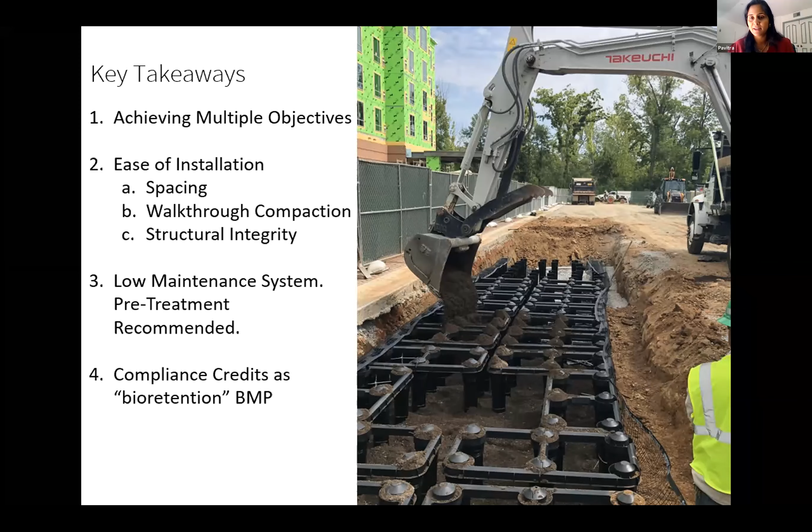So thanks again for this opportunity. I'm really thrilled to be part of this panel, and hopefully we can all start collecting the Q&A questions and forward them to the speakers to help respond. So thank you very much.